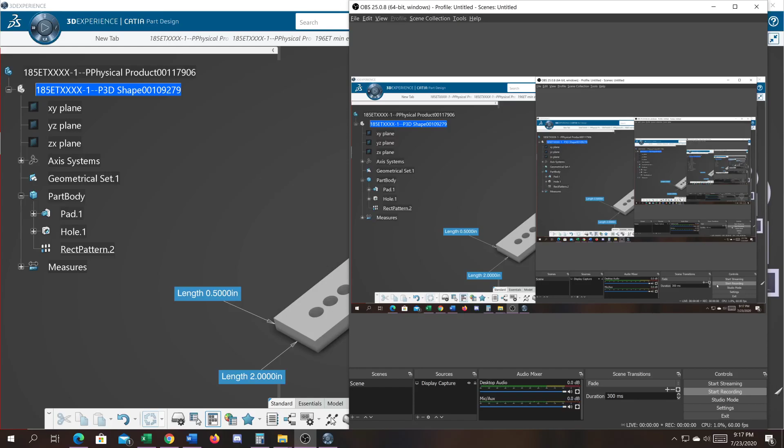Well, did you have any luck? I was going pretty fast.

You might not have caught this, but the key was I changed the parameters here to instance and length. So when I hit the down arrow, instance and length was the trick to getting that to work, where I knew the length from the first hole to the last hole was 9 inches. So all I had to do is key in how many instances I want.

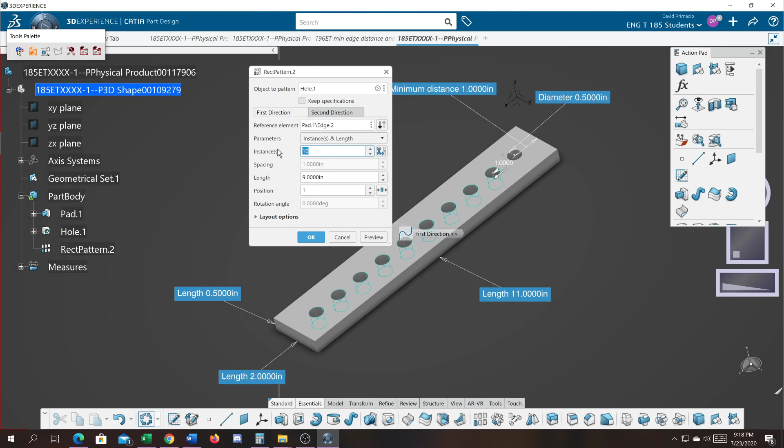And it will take the length and divide it by the number of instances and equally space them out accordingly. So when I change this to 10 and hit preview, notice the spacing goes back to 1. Change this to 5 and hit preview, notice the spacing goes to 2 1/4. So the whole distance from one hole to the next is 2 1/4, until you get to the last two, which maintain a 1-inch edge distance.

So the 1-inch edge distance was given. Since that was given, I could calculate the rest and let the computer do all the work, do all the multiplication and division for me. And that's the beauty of instance and length.

So set this parameter to instance and length. This length came from: the first hole is 1 inch off, the last hole is 1 inch off. That's 11 minus 1 inch minus 1 inch equals 9. That gives you the start and end of the first and last hole, which is 9.

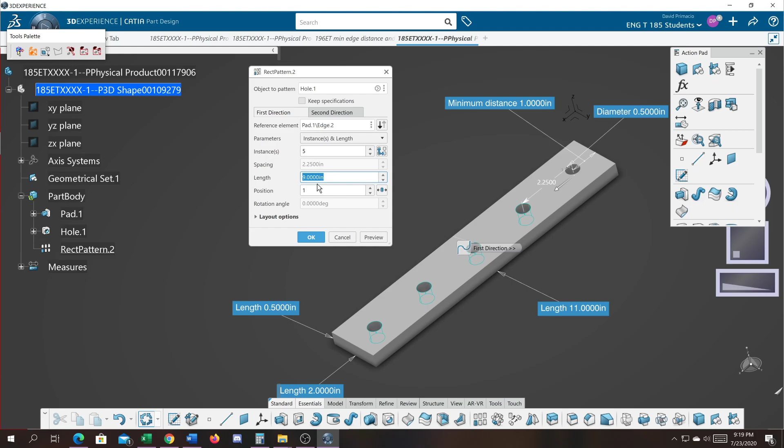If I were to change the pad and change this parameter from 11 to 20 and hit OK, it doesn't know that I've changed the length of that plate.

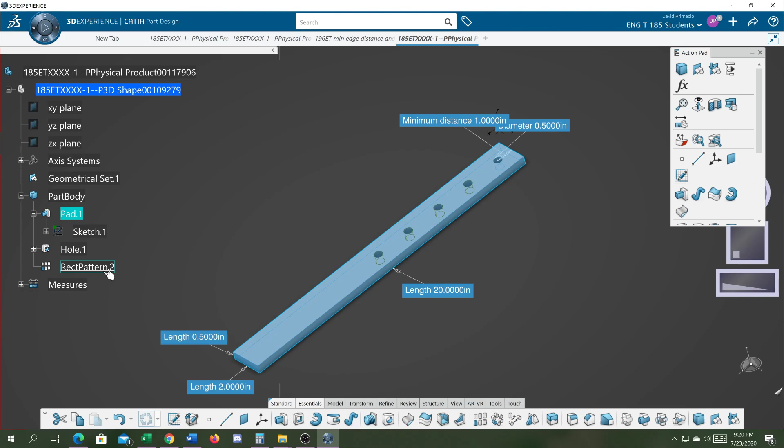I've got to go into the rectangular pattern again and calculate the length. The length is now 20, so it's 20 minus 2 times the edge distance of 1. Preview that, select OK.

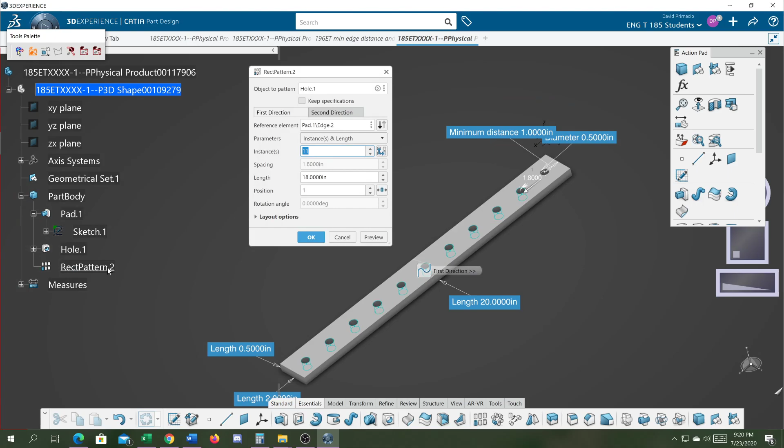Now when I change the pattern to 11, 13, 15, it's just going to keep automatically recalculating everything for me. I'll do 20 holes - it is getting pretty tight between the holes. I'll do 30 holes. Oh man, how many holes can I get in here?

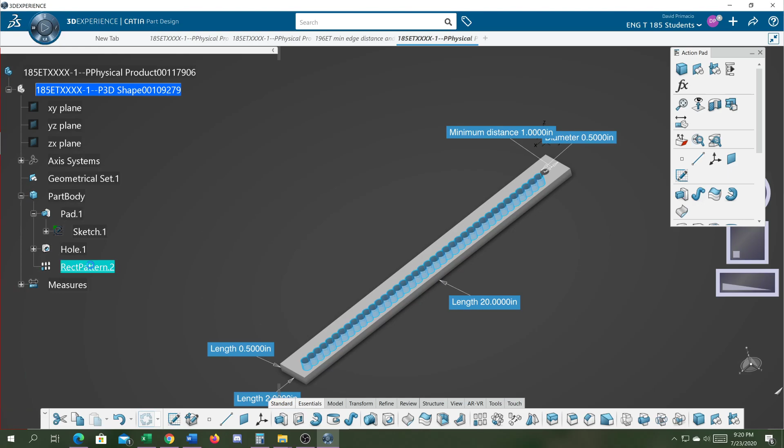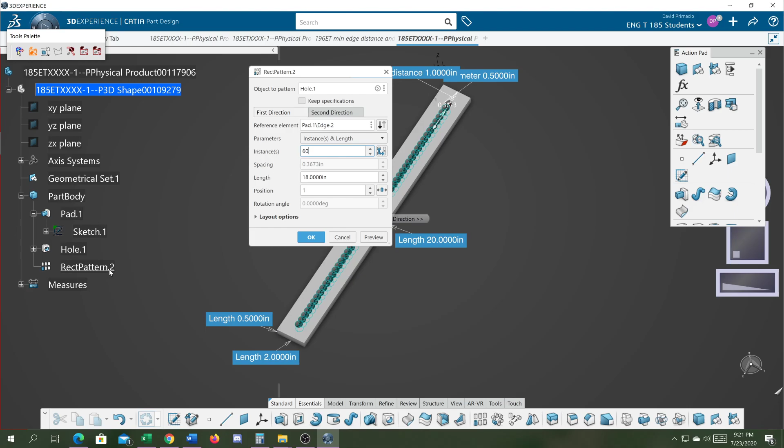40 holes. Look what's going on - they basically got a slot going on. It's a perforated edge, they're so close together. All right, if I needed a slot in the part, this would not be the technique I use to create that slot. I'll go to 50, 60, seeing if I can get the sucker to crash.

Oh, by the way, I talked about scalloped edges before. Basically, these are what scallops are like. So let's say you had a stress crack right here - it starts coming over, it'll stop at the end. If you have a stress crack up here, it might just keep going right down the line here, right? But these help stop the crack.

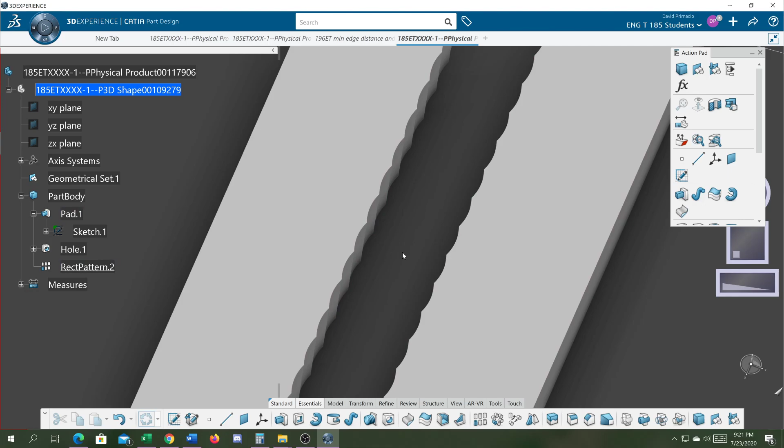Okay, that's not really what I'm trying to demo though here. I'm just trying to demo this cool feature called instance and length to set your parameters so that it'll automatically figure out your spacing for you. The reason why the spacing is gray here is because it's being calculated for you.

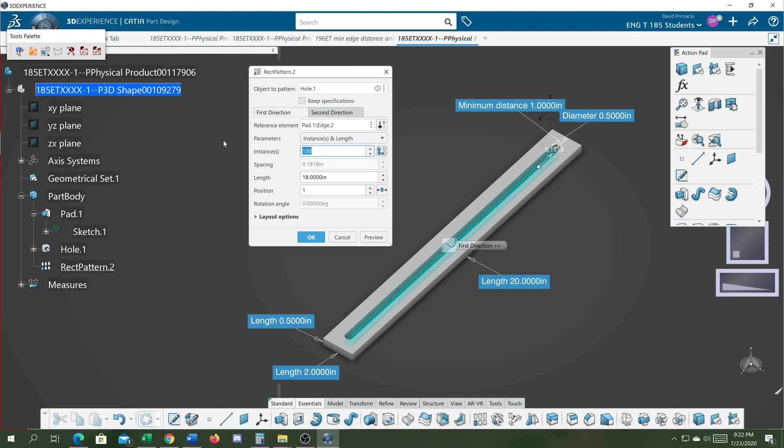It's taking the 18 and dividing it by 100, and it's coming up with 0.18. All right, I'll put that to something reasonable.

All right, so that's how you create a plate with the hole using instance and length. I'd like you to create a Word document on how to use instance and length, and what it does.